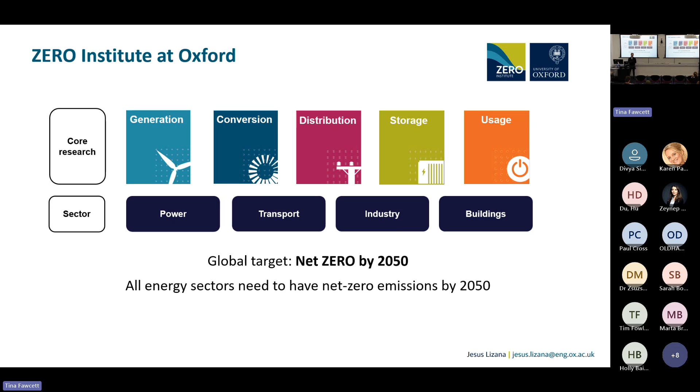Fantastic, thank you very much Tina. Thank you for coming, I hope for an interesting lecture about zero carbon heating and cooling. As Tina said, I'm a member of the leadership team at the Oxford Zero Institute, where we address research for the 5 main pillars of the energy system: generation, conversion, distribution, storage, and energy use, for the 4 main energy sectors: the power sector, transport, industry, and in my case, leading on most of the initiatives on the building sector. We are going to talk now about the building sector.

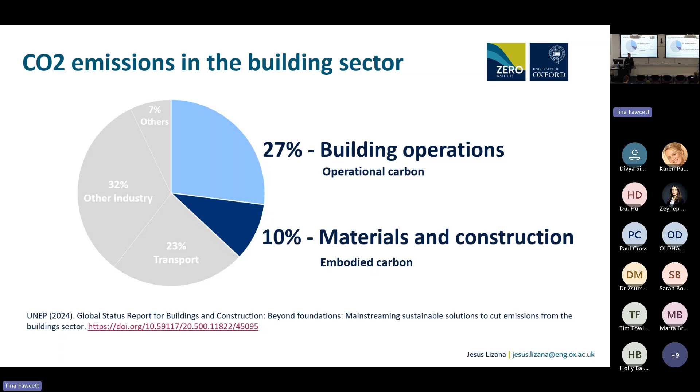The building sector is responsible for 37% of total carbon emissions. This is the current situation: 27% related to building operations carbon, and 10% related to materials and construction process - a situation that hasn't changed much in recent years. According to the recent report from the UNEP, the situation is awful. We are not even close to 10% of the path to decarbonize the building sector, probably one of the most difficult sectors to decarbonize.

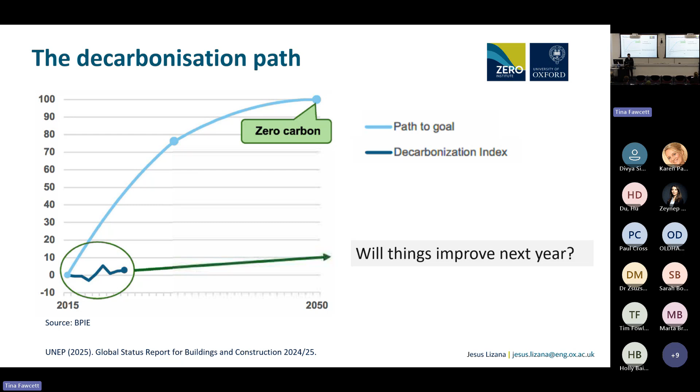In this presentation, I will address 4 points. The first one is: what is a net zero building? There is no clear definition, and I will try to show you the recent progress we have right now, or what we need to achieve to decarbonize the building sector. Then I will talk about the role of building services engineering and academia to support the decarbonization of the building sector. Later, I will try to explain or showcase the limits of current practices in the building sector, the current best practices, where we are right now. Is this possible just by deploying the best practices, or do we need to achieve something else?

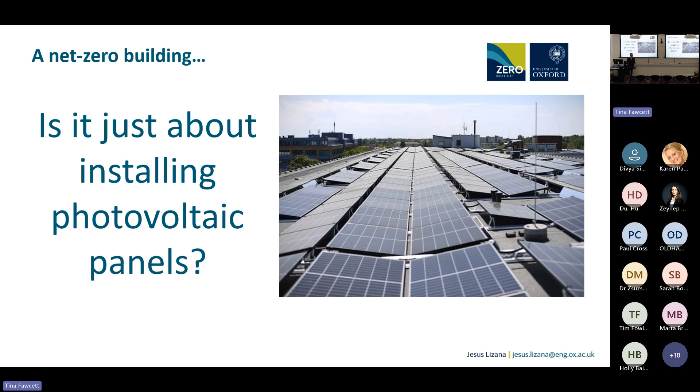I will finalize the presentation with 4 key projects, key research innovation in which we are working for heating and cooling. So I'm going to start with the first question: what is a net zero building? I try to ask this question to my students. Is this just about installing photovoltaic panels, battery, and we can be net zero, right? Electric battery, and we can completely decarbonize the building sector. Can we do this? Is this officially a net zero building? Of course, the answer is no.

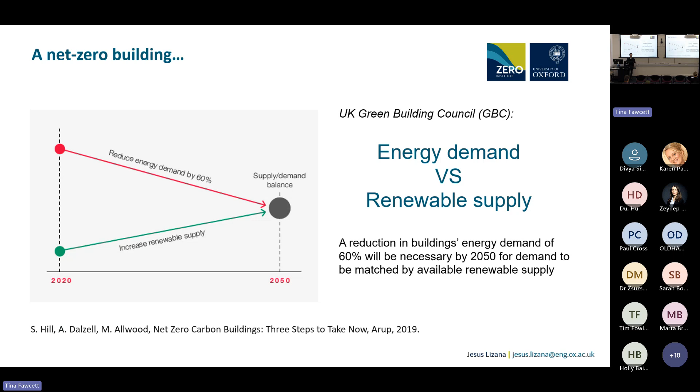There is a recent report from the Green Building Council explaining why we need to achieve a reduction of energy demand by more than 60% in order to balance renewable supply with demand.

Understanding this, there are many definitions of a net zero building. There is no one single definition, and that's not a problem. It's an interesting discussion. I think the situation now is slightly better than in 2023, but I will talk a little bit about them and focus on the one that I consider the most important one right now.

The Green Building Council in 2019 established a framework, a qualitative framework about the meaning of what could be a net zero building, but without any specific key performance indicators or specific target that we need to achieve.

The International Energy Agency in 2021 established a really interesting definition, the concept of zero carbon ready building. So this is not about being net zero now, it's about preparing the building to be net zero. Something really interesting - the concept was that we don't have to decarbonize the building sector right now, we only need to prepare.

Then in parallel, we have the Energy Performance of Buildings Directive from the European Union, responsible for addressing all the national standards that we have in different countries in Europe, with a new terminology for a net zero building: the zero emission buildings. Previously, if you remember, the concept was a nearly zero energy building. Now it's focusing on carbon emission, and somehow integrating some of the concepts previously defined by the International Energy Agency.

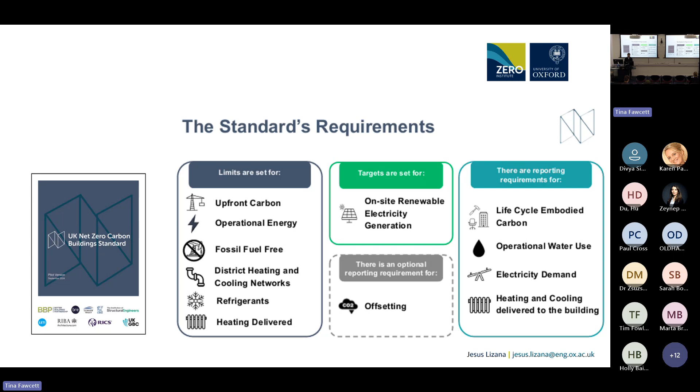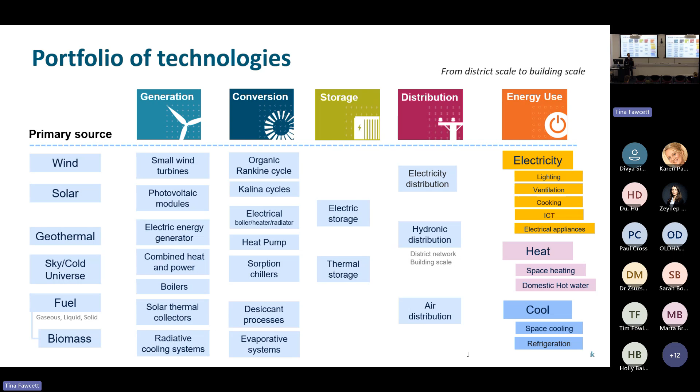With this framework, what is the role of building services engineering and academia in achieving net zero? We have a large portfolio of solutional technologies in the building sector to provide electricity, heat, and cool - technologies that we can classify in the 5 main pillars of the energy system, specifically for the building sector. And of course we can quickly identify what are the most promising technologies, right?

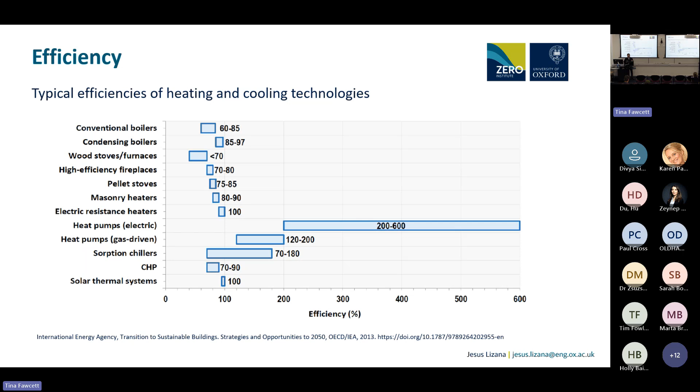When we look at heating and cooling, when we compare the efficiencies of all these technologies, heat pump is winning. Heat pump is the most promising technology and will be the most important technology to decarbonize the building sector. And this is something, all these existing best practices, that we try to address or teach as an academic institution.

This is something that we started last year, introducing new courses in the undergraduate programs and in the University of Oxford, different lectures and MSc programs, creating a new DPhil program which we are working on right now, and in the future, executive education and even creating educational resources.

The most important action initiative that we were leading was the university competition. We would like to engage students to start thinking about what radical innovations we need to address in the building sector to decarbonize, and there is no better way to do that than through an academic competition.

This is the UK team that participated, with different DPhil students also participating in the European competition on zero carbon data centers. This is a reminder that on the 21st of November, they will be presenting the winning project of this competition.

This activity was highly recognized. All the Zero Institute members who participated were recognized by different awards last year: the TIPS Award 2025 in Learning and Development, the ASTRAI 2025 Award for Zero Carbon Education, and the 2025 MPLS Teaching Award.

But even the students, in their first year participating, won 2 awards from 3 teams: the first prize for the European competition on zero carbon data centers, and the Rising Star Award from the Global ASTRAI competition, something we are very, very proud of.

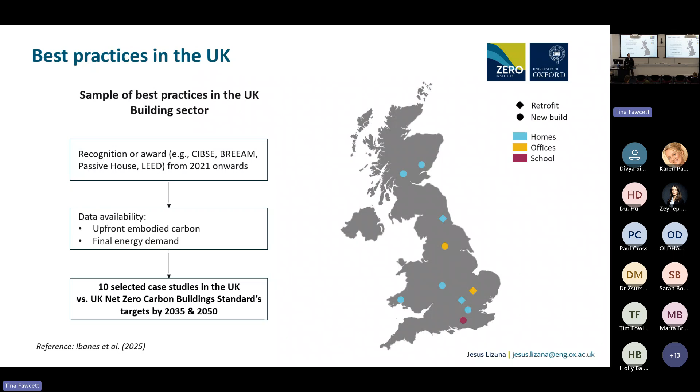Let's start by comparing the final energy consumption, the energy use intensity, with the target we need to meet to be a net zero building. You may see the target for 2025 is somehow very close. Most of the case studies are below this consumption threshold, which is fantastic. Some of them are not.

How is the situation going to change with this standard by 2035 and 2050? The requirement will be much stronger. Here we can see that even the best practices right now are close, and the effort needed is not huge. It's possible — even with best practices, with a little improvement, we will be able to meet this requirement easily. It's not a big challenge.

Let's try to compare it. One question: we have buildings here divided according to whether the building was measured with real data, or simulated. We identify the building that is closest to meeting the threshold by 2050 in the figure.

From the blue colors of the building, right? Do you know where this building is from? Who is the client of this building? University of Cambridge. Oh, we can do better.

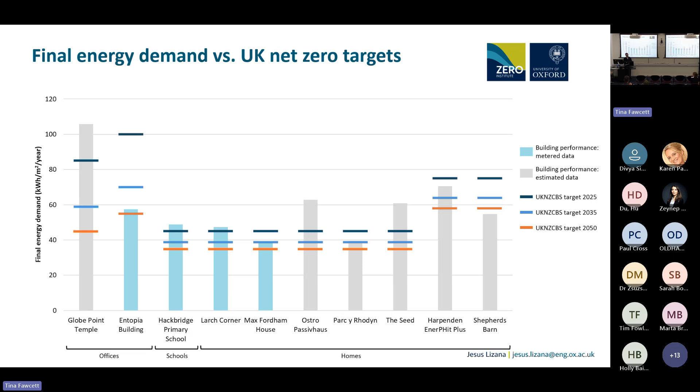Let's compare now the embodied carbon situation. This is going to be the most difficult one. Right now, according to the best practices in the building sector, the embodied carbon is, in some cases, between 400 and 600 kilograms of CO2 equivalent per square meter.

But let me show you the situation of the target, the limit that we need to achieve by 2035 and 2050.

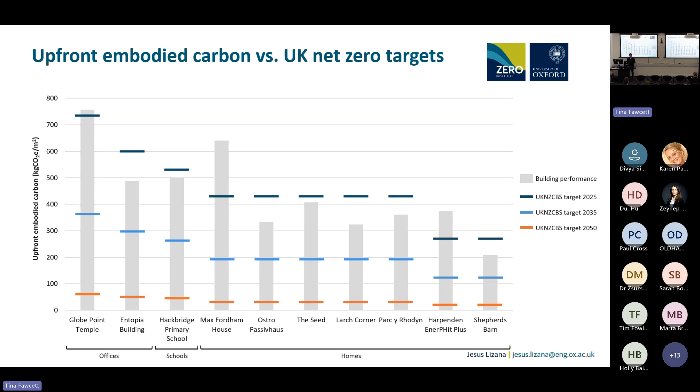This is almost impossible. This probably will be the most important challenge that we will need to address in the building sector: how to decarbonize the embodied carbon when we design and build buildings. It's clear to me with these 10 examples that best practices alone will not get us to net zero in the building sector. This is where I am leading the Zero Carbon Heating and Cooling Program at the Zero Institute, working on radical innovations that we need to implement in the building sector.

We decarbonize it to reach net zero, mainly working in three main areas: on heating decarbonization, working on new materials and technologies to decarbonize the building sector; on climate risk analysis, generating and analyzing new climate data sets and information that we can use to understand much better how we need to design buildings for the future climate; and on cooling, more focusing on climate adaptation, how to prepare for a changing climate.

By heating and cooling in the building sector, you only need to see this picture. 50% of the energy demand in the European Union is for heating and cooling. Most of the energy demand that we use for buildings is thermal, not electricity. 30% in Europe is associated with space heating and water heating, mainly in buildings. 4% is cooling, not only for buildings but other applications. And of course, there we have medium and high temperature heating for industry. But heating is the most important energy use in Europe.

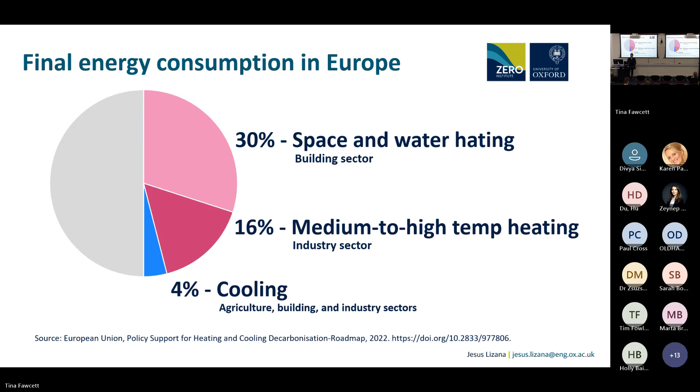And of course, not working alone - working more than 10 years on this topic, as Tina mentioned, previously working in the building industry. Later I joined academia, working across Spain, Germany, Scotland, Portugal, Spain again, and from 2021 in Oxford, collaborating with more than 60 international institutions, with many academic publications with all of them.

And I will focus on the three most interesting innovations in which we are working right now. These are the key radical innovations on heating specifically that we have with three projects.

The first one is associated with hybrid indoor design conditions. This is a project that I started with European funding through my Marie Curie project in 2021, and we continue working on this. The second one is about optimal sizing and control of heating systems. This is EPSRC funding for the development of an open building energy simulation software to improve how we size heating and cooling systems. And the last one is about a better auxiliary system for heating - a project about low temperature thermochemical reactions for heat batteries.

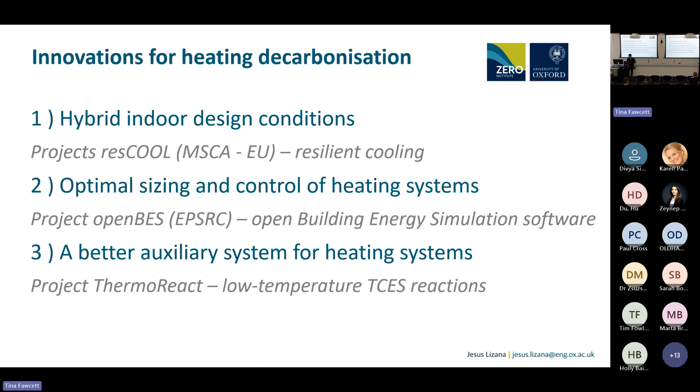Let's start with the first project. It's quite clear that thermal comfort is not temperature. This is something that we overlook completely when we are calculating or sizing heating systems. We have 6 thermal comfort variables that we can use and play with to create a comfortable environment: 4 environmental parameters - dry-bulb temperature, mean radiant temperature, relative humidity, and airspeed - and 2 personal factors - the metabolic rate and the clothing insulation layer, the amount of layers that we are wearing.

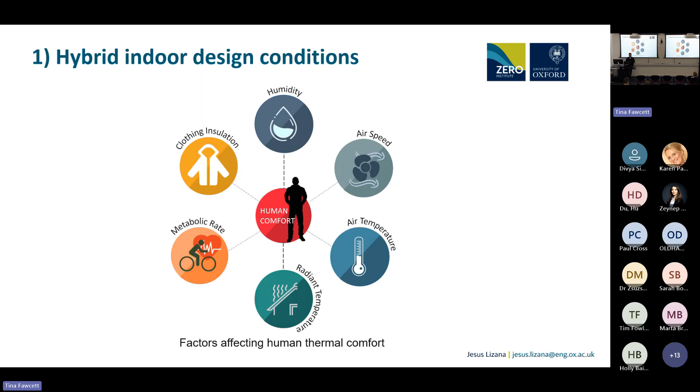The most important key message here is that for every degree Celsius that we can modify the dry-bulb temperature, we can save between 5 and 10% of the energy demand for heating and cooling. This is huge. How can we do that?

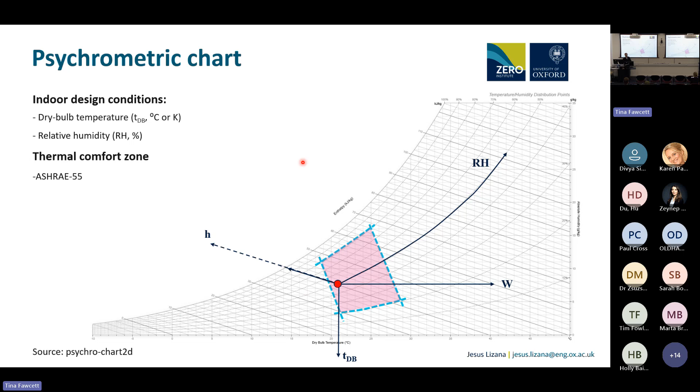How do we calculate a heating system? How do we size a heat pump for your new home? We define the indoor design conditions, and we establish the outdoor design conditions. For Oxford, this value is minus 5.5 degrees Celsius. How many hours in a year do we have minus 5.5 in Oxford? Zero, most years - just a few hours. This value is traditionally obtained from a percentile of historical temperature. It's the worst case scenario that we may have, and the system should be able to meet, to be able to heat that home for that particular scenario. But it's a very strange situation.

What we are doing in this project is, it will be super interesting if we can move down the thermal comfort zone without sacrificing comfort, of course. Why? Because remember, by every degree Celsius that we decrease the thermostat, we can save between 5 and 10% of energy. That's huge.

How to do it? Also, if we decrease this set point, we also reduce the capital cost for the heat pump, because we reduce the peak load. This is another benefit. So the potential benefits will be a reduction of 30% of the energy demand and a reduction by 10% of the heat.

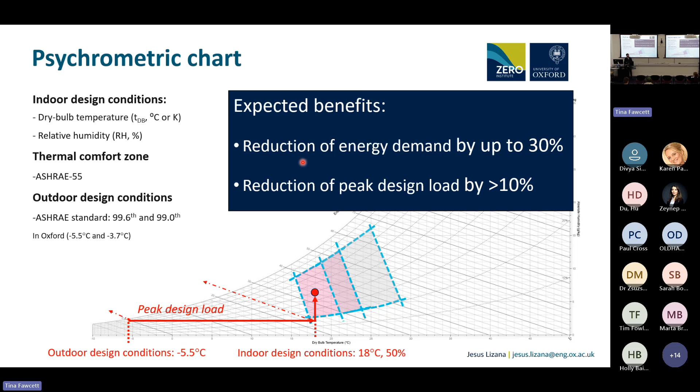How can we do this? Please don't try this at home. It can be dangerous and could even spark a thermostat war, something that we saw in the town hall last year. Even one member of the cabinet said clearly someone has lost their temper and thought, right, I'm going to solve the problem right now by padlocking it.

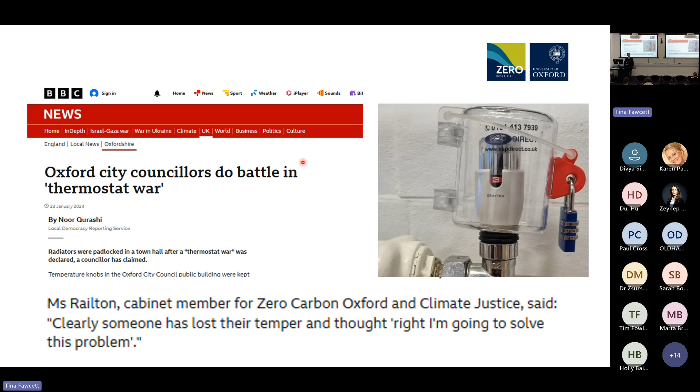Please take care if you try to do this, but I'm going to tell you how. This is something we are working on at the Zero Institute, and it's working fantastically well. The first step: what can be measured can be controlled. So we need to measure thermal comfort, not only temperature.

This is a device we were working on last year to measure all the thermal comfort variables. With all these variables, instead of measuring a specific temperature that we don't know will be comfortable, we measure the predicted mean vote index. An index that tells us the thermal comfort sensation from -3 to +3, where -3 is cold, +3 is hot, and the neutral, perfect thermal comfort zone is 0.

This is not new. It was created in the 70s by Fanger. We are not using it, and the potential is huge. Something really important to understand is that with the predicted mean vote index, even at the neutral comfort zone, when the index is 0, between 5 and 10% of people will be dissatisfied. This is really important. So even at the perfect thermal comfort situation, people will complain.

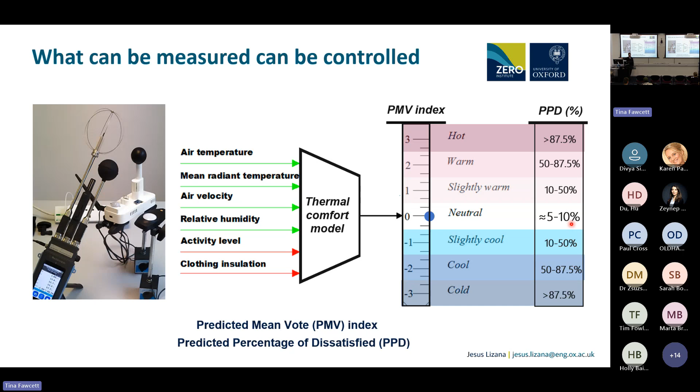Understanding this, what is the next step? We need to tell these people: stop complaining. We need to empower the occupants and tell them it's okay, the thermal comfort sensation is fantastic. We know that between 5 and 10% of people are dissatisfied, but 90% are okay. This is quite important, because most of the time we change things only because one person is complaining.

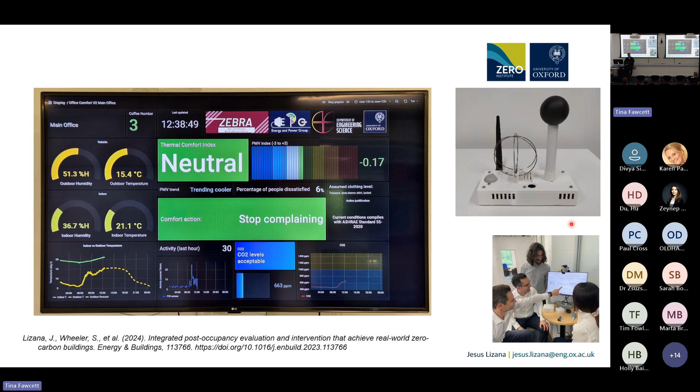So as soon as we inform people, that's where we can play scientifically and well. Then we can start moving from the classical approach of providing heating only by controlling the dry-bulb temperature. As you can see in this figure, now we have the psychrometric chart, the thermal comfort zone, and also the values for this index, where the white area is what we traditionally call the thermal comfort zone.

This will be when the index is between -0.5 and +0.5, and from there it increases to slightly warm, warm, or hot, or slightly cool, cool and cold.

How can we then decrease the dry-bulb temperature without sacrificing comfort? We need to start playing with a second variable. In this case, the mean radiant temperature. The mean radiant temperature is the temperature emitted by the surfaces. Traditionally, we don't touch it.

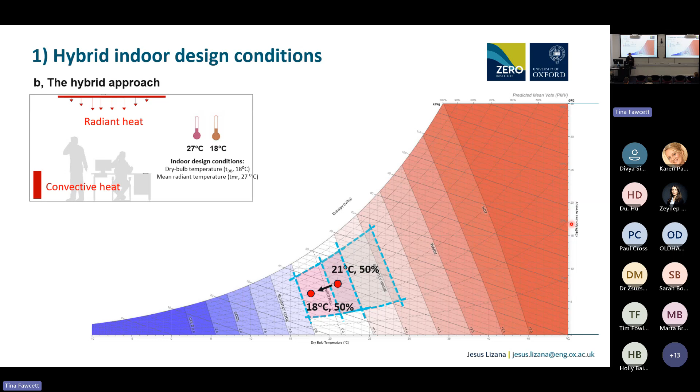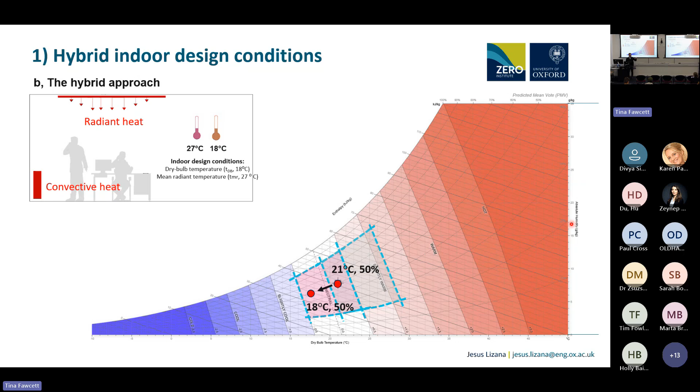Well, not when we have an underfloor heating system, where the mean radiant temperature will be slightly higher, but we don't measure it or control it. What's interesting is that if we combine, instead of only convective heating with a traditional radiator, radiant heat—for example with an infrared heating panel, which is becoming really interesting now—we can start controlling these two variables together. And we can create a perfect comfort environment at 18 degrees Celsius of dry-bulb temperature and 27 degrees Celsius of mean radiant temperature.

So for heating, what is the opportunity? Introducing a second variable, the radiant mean temperature. For cooling, introducing a higher air speed will be a fantastic solution, because then we will move the thermal comfort zone to the upper zone of the psychrometric chart.

What is the question that we would like to answer? Of course, there will be an energy penalty, because this system will have a consumption. In cooling, it's quite easy to assume that fans will consume much less energy than a chiller or a heat pump for cooling mode. But for radiant heat, we need to understand how to control and use this properly, and this is where we are working right now.

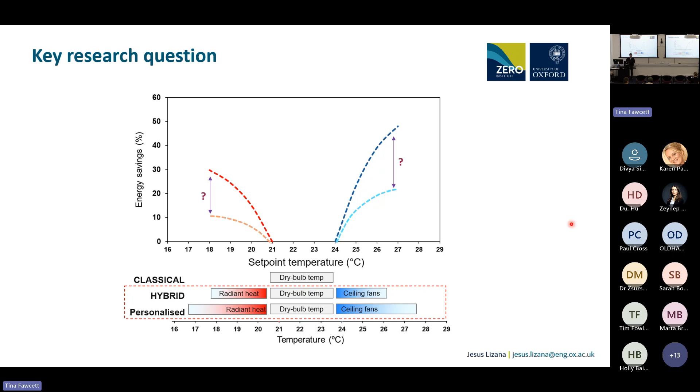The second project is about it's time to stop over-engineering systems for managing peak loads. I hope that you agree with me here. Why was this never a problem and now it's becoming a huge problem?

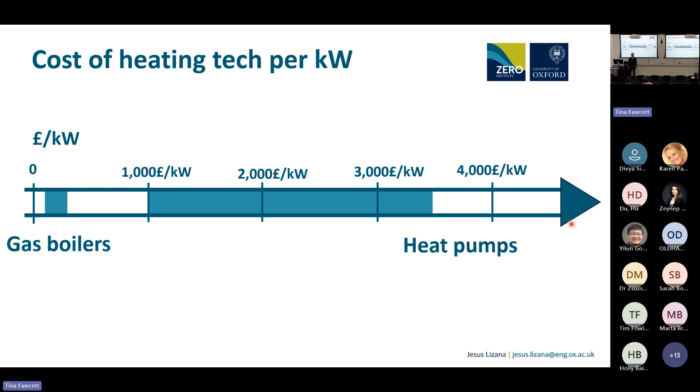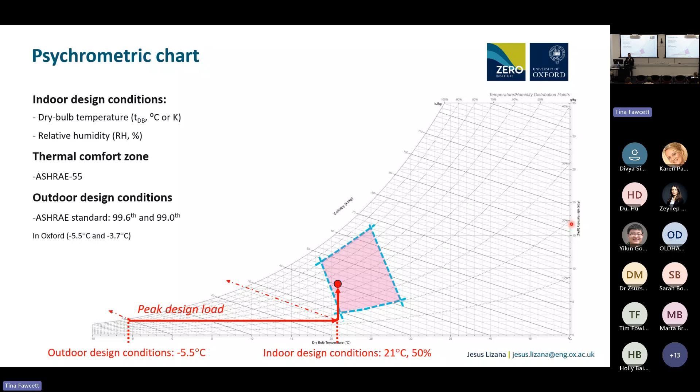What is the traditional approach for heat pumps? Something, for example, that we installed in Wolfson College. From the maximum peak load that we calculated, of course, we are going to have a heat pump system, the main system, that is going to cover two-thirds of the total capacity. Why two-thirds? Because it's very expensive, so we need to reduce the size.

And then we're going to introduce an auxiliary system that, of course, can be gas, but we want to eliminate gas completely, so it will be an electric heater, because the price of an electric heater is close to the price of a gas boiler. It will be 200 pounds per kilowatt. It's much cheaper.

The problem, or the opportunity, is that with the power of smart control, digitalization, AI, we can start controlling buildings completely differently. Now we can basically define a system that can avoid that worst case scenario, that worst case situation that is going to happen a few hours a year. Now we can completely eliminate it.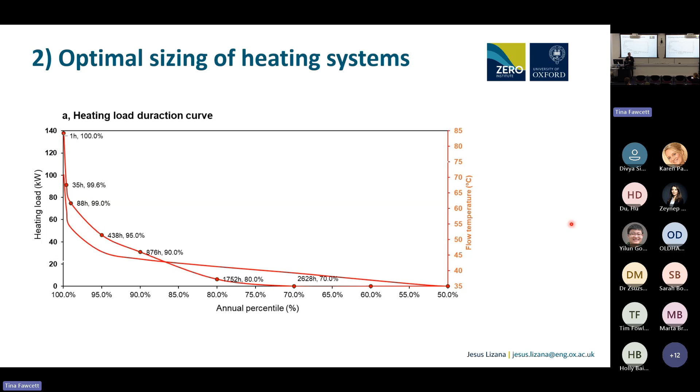There is another building, also in Cambridge, a heritage building, where they decided to operate the building full time the whole year in order to decrease the flow temperature of the hydraulic distribution system, so we can drastically reduce the size of the heat pump and the capital cost, while at the same time increasing drastically the seasonal efficiency of the system. But again, this is a drastic situation because there is a penalty.

How can we do this better? Understanding the potential of a smart control, we can start preheating the building only for these extreme situations when it's very cold. Then we can completely have the benefit of eliminating the peak loads, but with minimum penalty in the energy consumption of heating.

This will be ideal, and will drastically decrease the size and the capital cost for the heat pumps from two-thirds to one-third, which is huge. So we are reducing by 50% the capital cost for a new heat pump system.

At the same time, it's much more interesting to have a variable flow temperature rather than a fixed flow temperature. Because if we fix the temperature of the hydraulic distribution system around 55, 60 degrees in order to meet the peak load, that will be super inefficient. What is more interesting is to, in real time, decrease that temperature according to the load we are expecting, so we maximize the seasonal efficiency of the systems.

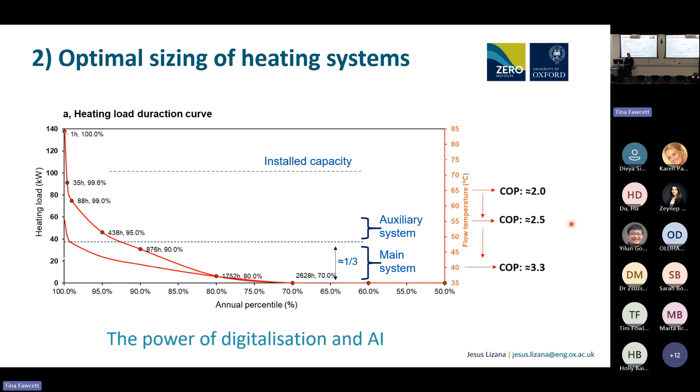So control will play a really important role here. But we need to understand this from the beginning, from the design stage - how to start designing a new system, understanding the opportunities we may have if we start installing this smart control system. So this is the project we are working on right now: how to design open software to create cost-effective solutions for achieving net zero.

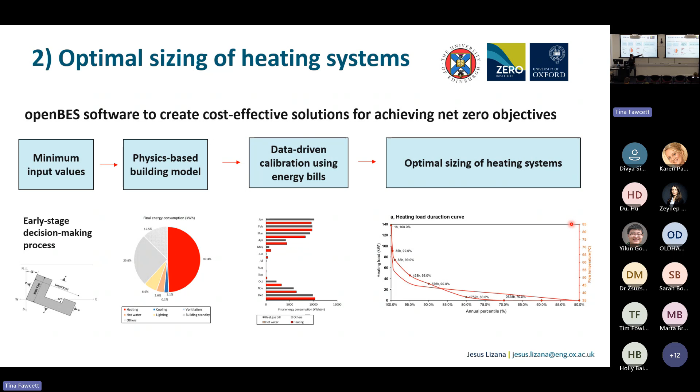Software for the early stage decision-making process, where with a reduced number of input values, we can create a physics-based building model where we can test these smart control opportunities, and do a parametric analysis on how we can reduce the size for the new thermal system we want to install for the building.

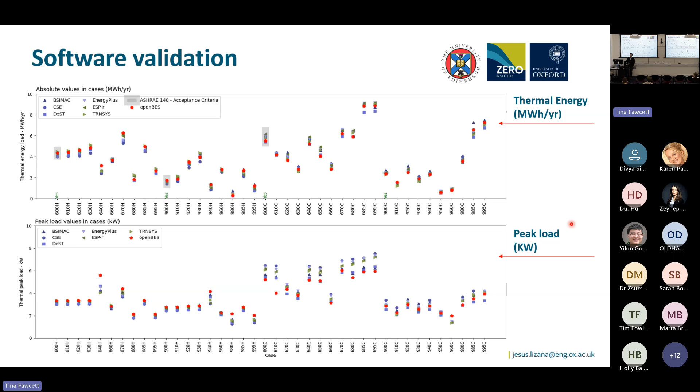I'm very happy to share this slide because we were fighting a lot for the software validation, where we were comparing the software with 40 different cases, with more than, well in this case, with 6 different professional softwares. We are happy to say the software is almost validated, achieving the same level of accuracy for the annual thermal energy demand and also for the peak load. So hopefully at the end of this year, we will have this ready.

The final project will be about this key message: investment in an auxiliary system for just 96 hours a year doesn't make sense. Let me explain this.

Question: can we replace this auxiliary system that we are going to use only for 96 hours a year for something that we can use to cover peak loads, but at the same time provide additional benefits to the building?

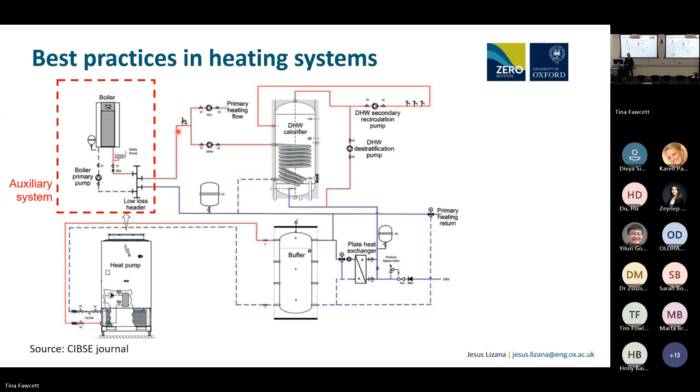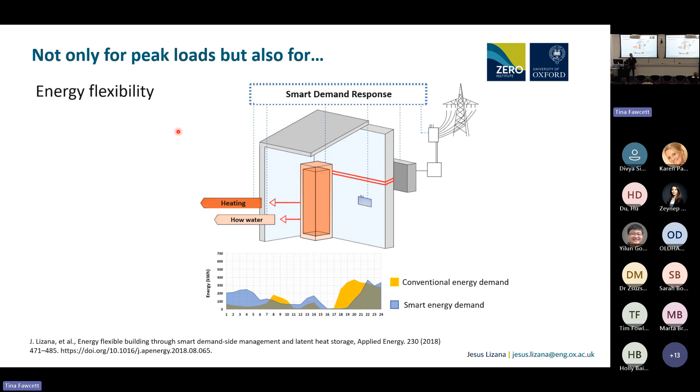In thermal energy storage, we have a large portfolio of materials for sensible heat, latent heat, and thermochemical heat reactions. Traditionally we worked a lot with latent heat storage, which has many benefits, but many limitations, specifically related to the power we can deliver with this material.

Now we are focusing on thermochemical heat storage for two main benefits: the energy density is much higher, and we can have almost negligible heat losses if we design the system properly, something we don't get with sensible or latent heat. So we can store heat for long-term periods with almost zero losses.

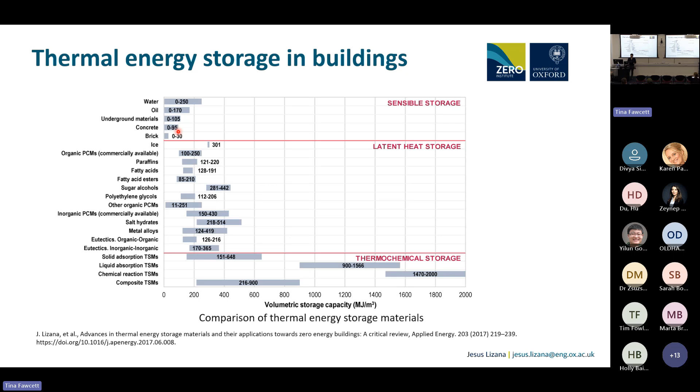What materials are we using? Sodium acetate-based composite materials. And why? Because they have fantastic operating conditions for heating, for low temperature heating.

This is what we want. So zero carbon heating means low temperature heating. If you continue with a high temperature system, it will not be efficient. Why is this material so promising?

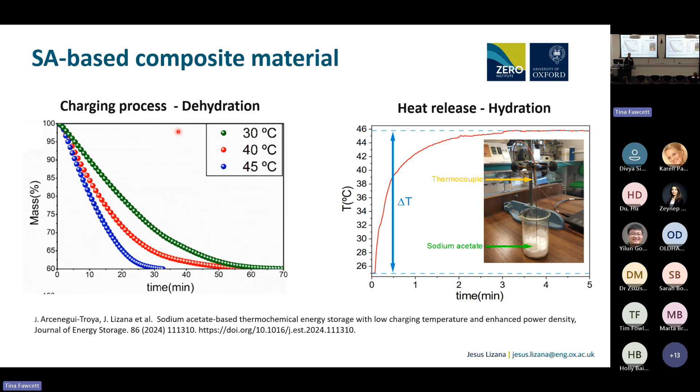We can charge the battery even at a temperature of 30 degrees Celsius. And in the discharging reaction, we can reach a delta temperature of more than 20 degrees Celsius, reaching a maximum temperature close to 50 degrees Celsius—operating conditions that are perfectly aligned with the heating demand in buildings.

We published a proof of concept in 2024, and now we are working on a thermochemical reactor design where we are exploring how to integrate these materials into what we traditionally call an auxiliary system, but not only for covering peak loads, also to provide heating flexibility.

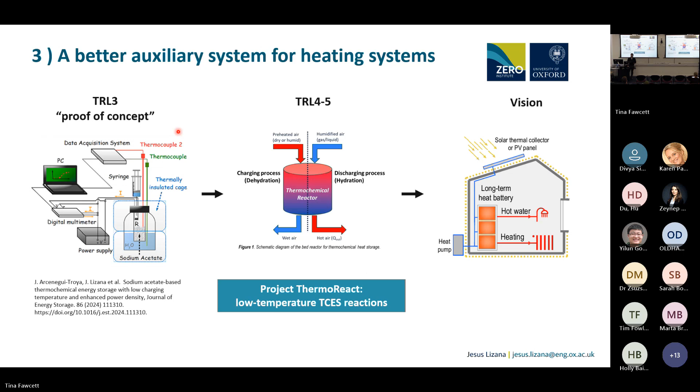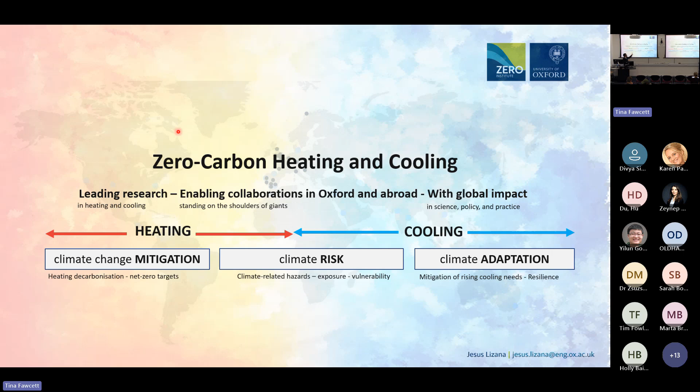These are the three projects about heating decarbonisation. I have one more, if I have time, Tina? Yeah, 4 minutes. That would be fantastic. I will talk about the work on climate risk analysis and climate adaptation.

What is very important about designing for the future is that we need to deeper understand future climates. We need to prepare to adapt the built environment for the next 30 to 50 years. This is where we are working on citizen science for accurate climate information.

We are working with two approaches here. The first is global climate modeling using the citizen-driven distributed computing infrastructure that we have here at Oxford, the climateprediction.net network, where we use the computational capacity of computers globally distributed, more than 30,000 computers, and you can sign your computer to be part of this network.

We are using that network to model the highest global mapping of temperatures at 6-hour resolution, every 60 square kilometers, to understand how heating and cooling demand is going to change for different global mean temperature rise scenarios.

Something also related to citizen science is the use of citizen weather stations. Data from stations that you can buy, install at your home, and share in open source, so we can use all this information to better understand the higher temperatures we find in cities due to the urban heat island problem.

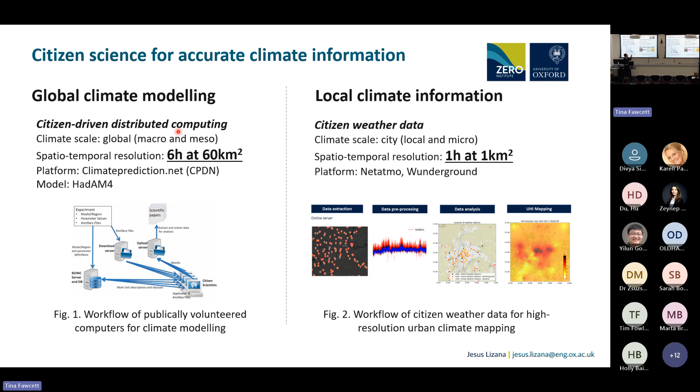In this case, we are focusing on real-time observations to understand the problem of urban overheating, targeting a resolution of 1 hour at 1 square kilometer.

These are the two concepts. As you can see, this is the expected resolution we can achieve with this global modeling of temperatures. And this is what we see when we start using the citizen weather station data, where we can clearly understand the implications of the urban heat island in the London climate.

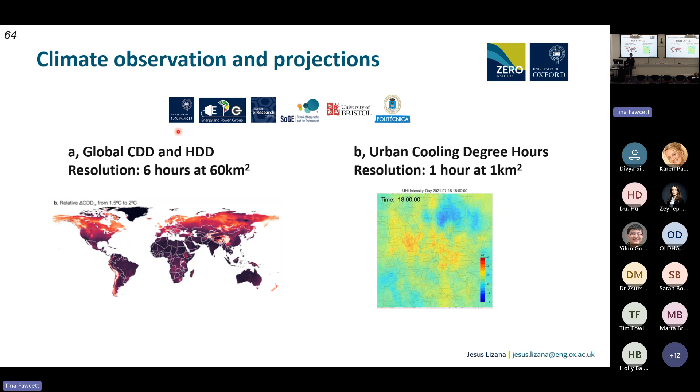And we can see at night, urban heat island intensity with a temperature even close to 6 degrees Celsius. But I'm going to focus on this workstream quickly in this presentation, because we just got the last paper published last week.

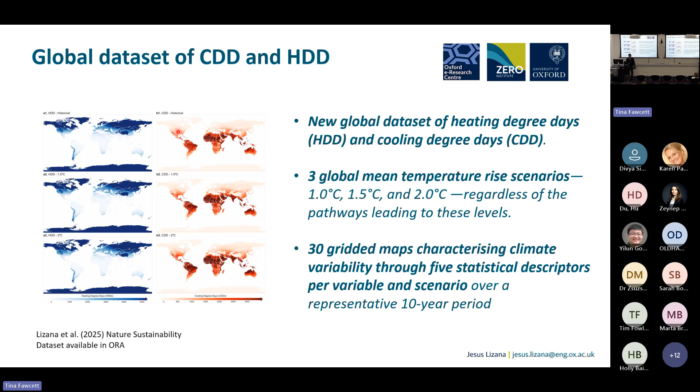I'm very happy to share this because it was a long fight to get this paper published in Nature Sustainability. We published a new global dataset on heating and cooling degree days, the largest dataset we can find today, able to characterize climate intensity on heating and cooling globally for 3 global mean temperature rise scenarios: 1 degree Celsius, 1.5, and 2 degrees Celsius, regardless of the pathway we take to achieve this threshold. This is a dataset with 30 grid maps characterizing climate variability through 5 statistical descriptors, and I'm going to finalize with the most important key message we identified from this analysis.

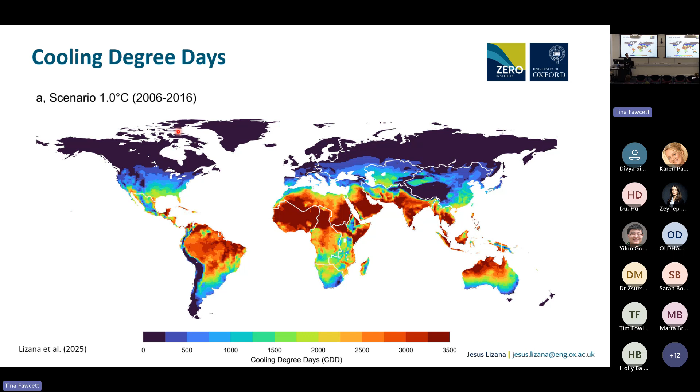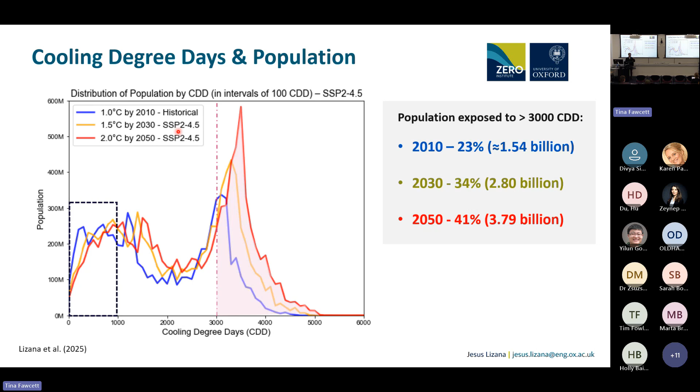I'm going to finalize also with a psychrometric chart, but with an interesting question. In Spain, I am from Spain by the way, so in UK we are here around 100. In Spain, we are close to 1,000. Do you know why in Spain we have the siestas during the hottest hours of the day? People may say that we are lazy. We wanted to say it, but we couldn't. People from the North of Spain also complain that we are super lazy. But the secret is this: when we decrease the metabolic rate from 1 MET, normal activity, studying, writing, to a siesta, to a nap during the hottest hours of the day, to 0.7 MET, we are moving the thermal comfort zone at which we feel comfortable. There is no better way to address ultra low cost cooling than having a siesta. So next summer, if too hot, just remember this presentation, take a siesta, everything will be fine.

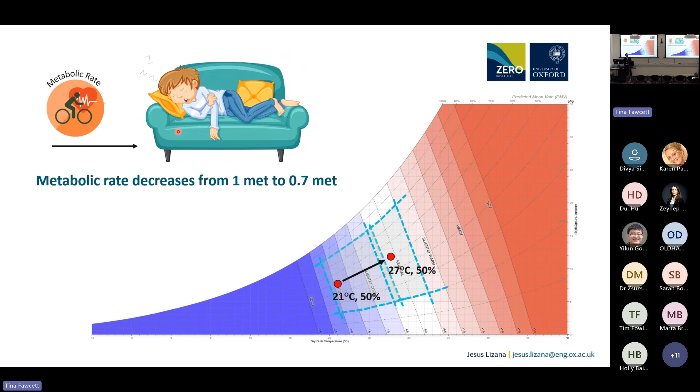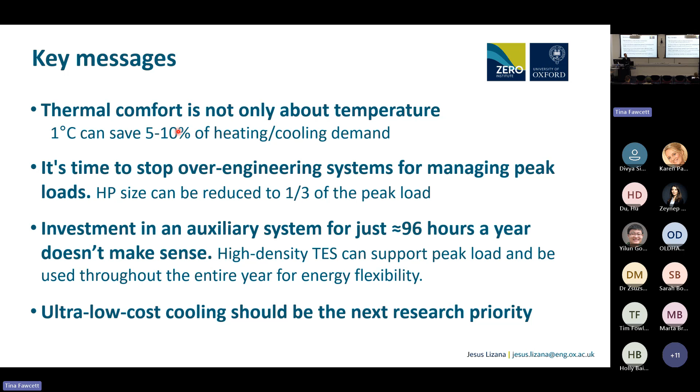Final key messages, and I conclude here. Remember, thermal comfort is not only about temperature. Only 1 degree Celsius, we can save between 5 and 10% of energy, and the opportunity is huge. It's time to stop over-engineering systems for managing peak loads. The heat pump size can be reduced to a third if we start sizing systems properly. Investment in an auxiliary system for just 96 hours a year doesn't make sense. This is where high-density thermal energy storage can support peak loads and be used throughout the entire year, for energy flexibility too. And the last one: ultra-low-cost cooling should be the next research priority. We want to fight for climate adaptation, where the siesta probably will be the winner. And this is my presentation. I hope that you enjoyed it. Thank you very much.